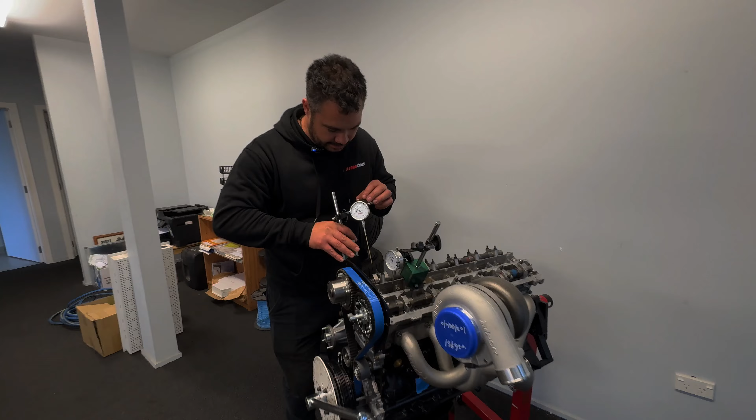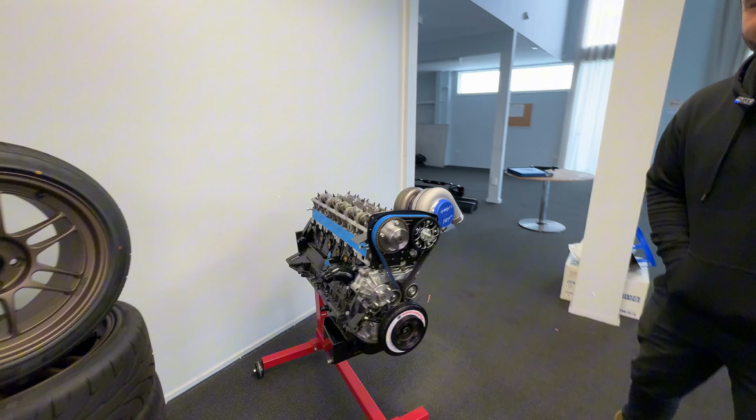It's Josh here from Kelford Cams, and today we are going to be doing some cam timing on this RB25 Neo engine. Making sure that our opening and closing events in regards to piston position is very, very important.

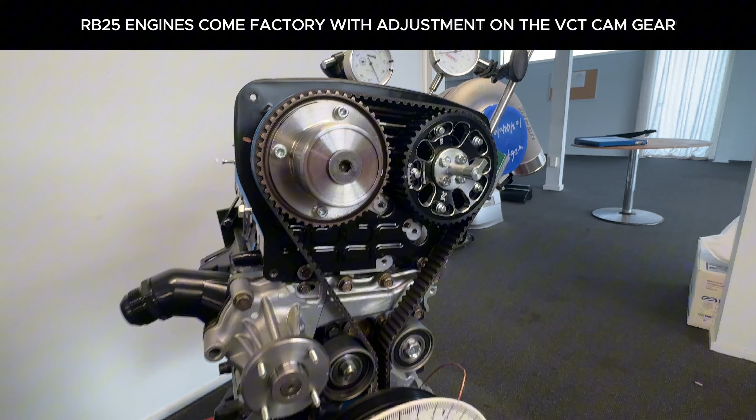So anyone with an RB25 hydraulic engine or solid lifter Neo, they do come factory with adjustment on the VCT cam gear. In this case, there has been an aftermarket, Franklin Performance I believe, option fitted. This allows you to adjust the front of the cam gear without actually removing the cam gear.

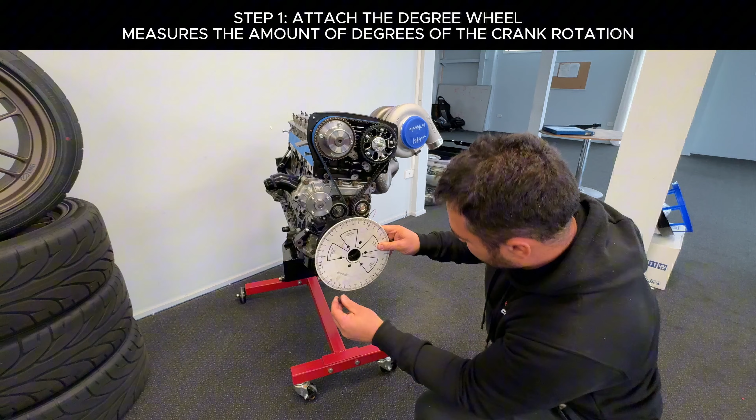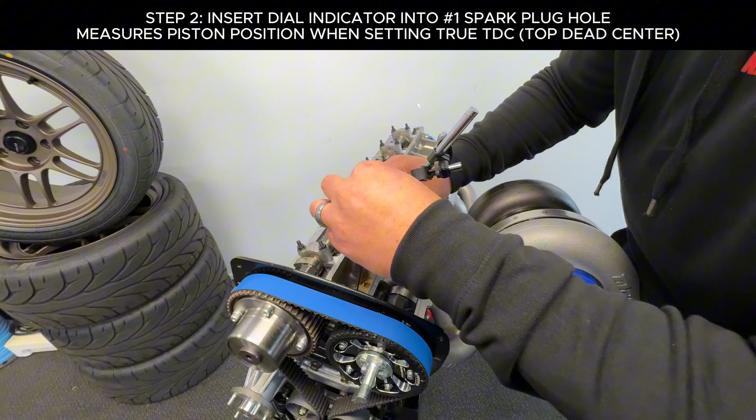Right, first up is our degree wheel. The degree wheel is going to be measuring the amount of degrees of crank rotation. Alright, so next up is putting a dial indicator into number 1 spark plug hole. This here is going to be for us to measure true TDC. And we are going to zero our pointer on the degree wheel.

The reason we're doing this is because there is always a piston dwell that's dependent on rod ratio, the length of the conrod in regards to the stroke of the crank. Because there's going to be a point that the piston stops but the crank still moves, we actually need to find the middle ground of that. So doing this procedure allows us to find true TDC.

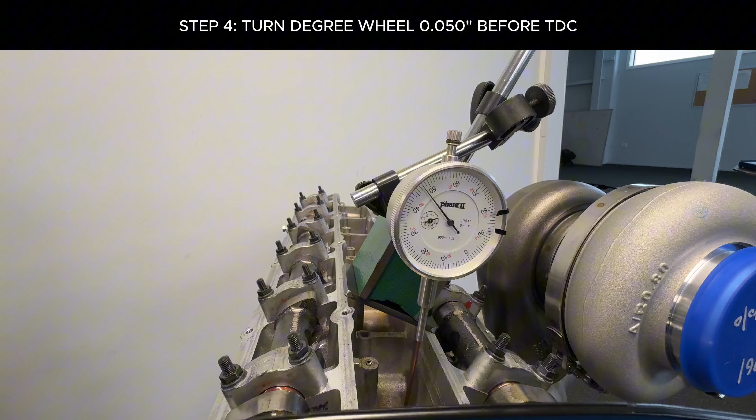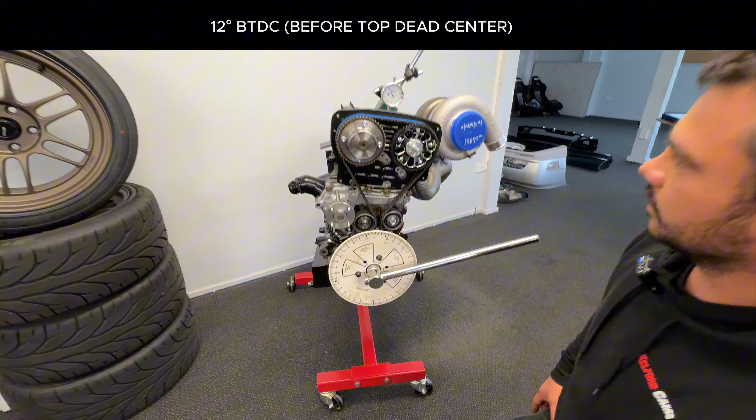First things first, we're going to come up to 50 thou before top dead center. We're going to stop at that point and see what number we have on our degree wheel. Cool. So we are looking at 12 degrees before top dead center on our degree wheel. Alright, so we've found our position, 50 thou before top dead center, and we're going to come up to TDC.

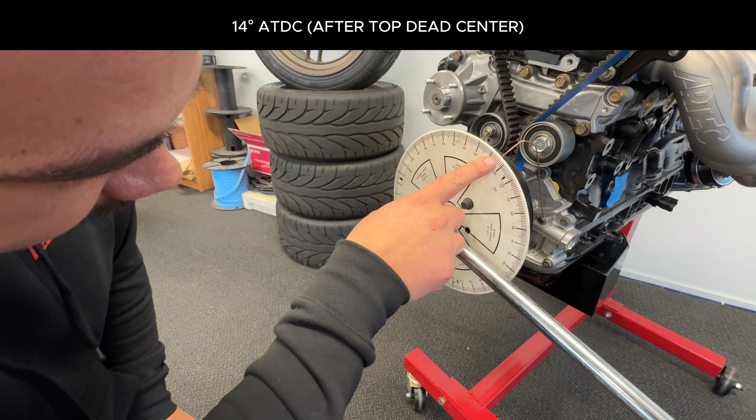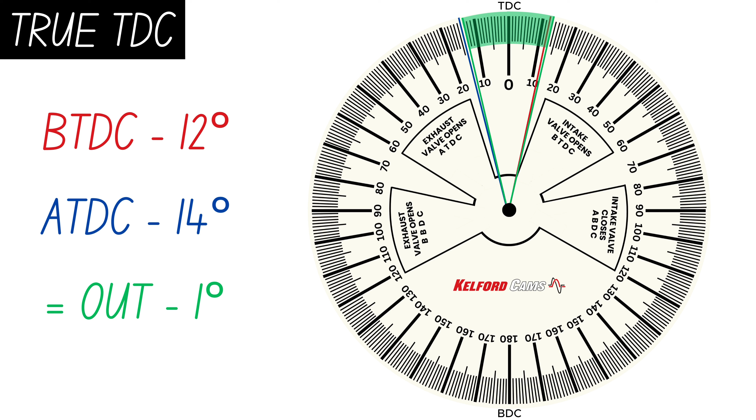And then 50 thou down the bore. And we are on 14 degrees after top dead center. We've done our 50 thou before TDC, 50 thou after. We've got our 2 numbers on the degree wheel, and what we've found is we are actually a degree out. What we're trying to do is actually split the difference here and understand how much dwell is in this engine.

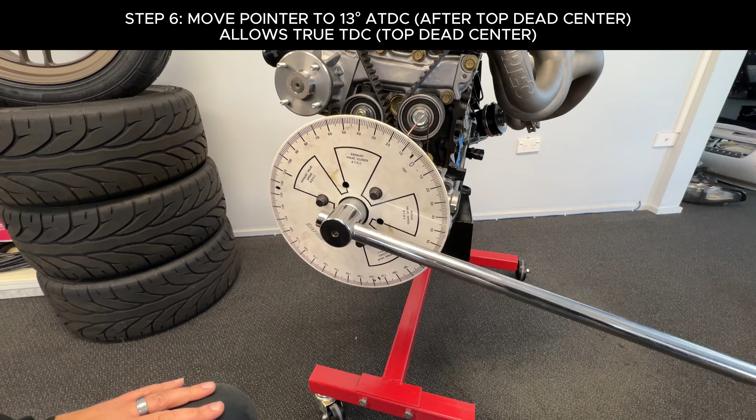Moving our pointer to 13 degrees after top dead center, just like that, will allow us to be true TDC. All right, so we've made our adjustment to our pointer position, and now all we're going to do is just check our work. So we're going to basically go through the same procedure again. We're going to find 50 thou before top dead center, just like that, and we're going to check our pointer position, and we are bang on 13 degrees before top dead center.

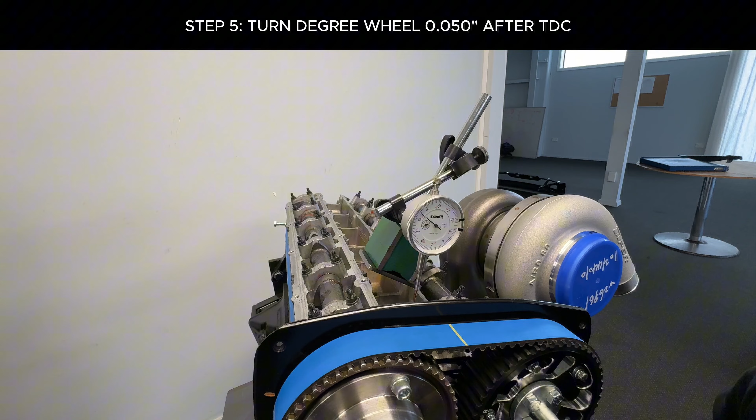So the last thing to do is just confirm we have the same number on the other side. So we're going to come up to TDC, back down to 50 thou, and we're going to see what number we have. And just like that, 13 degrees. So now we're happy to move into the next procedure, which is setting up the dial gauge onto the intake cam and degreeing the intake camshaft.

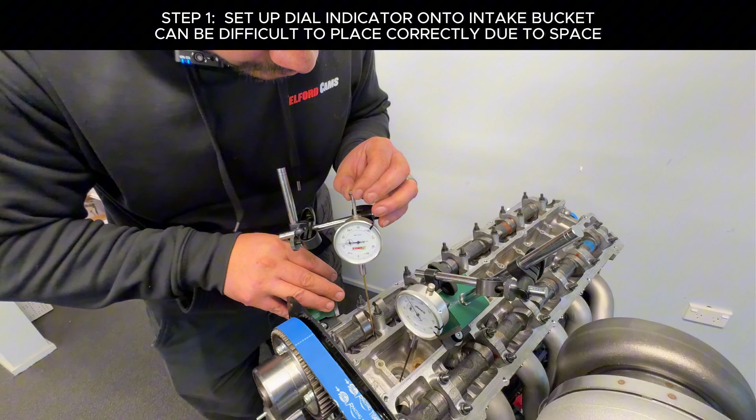Okay, so next up is we're going to set up our dial indicator onto our intake bucket. This can be a painful task, unfortunately. There's not a lot of room between the camshaft and the bucket. So once we've set it up, we want to do some testing to make sure that there's no fouling when we rotate the camshaft. An important note is to make sure our pointer is straight up and down.

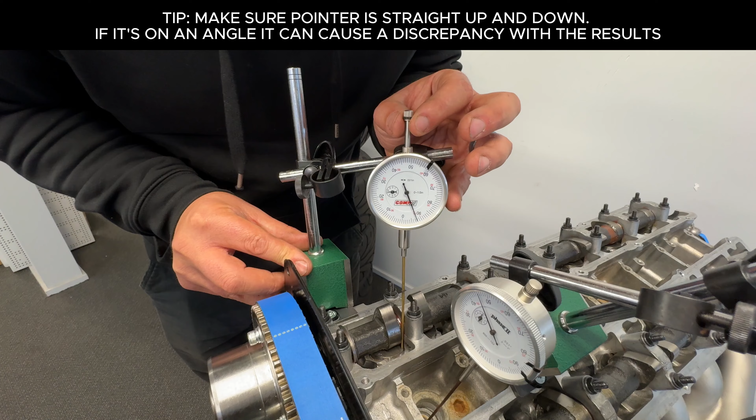Sometimes if it's on an angle as such, we can have a discrepancy with our lift. So just make sure that we're square. So now we're set up with our dial gauge on the intake cam bucket. We're going to go through the motions, look at the opening and closing numbers, do some maths. All right, here we go.

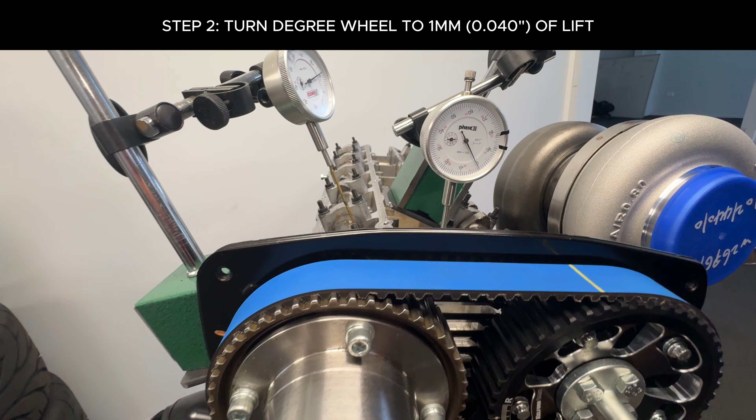So the intake valve's about to start opening. We're going to come up to 1 millimeter of lift. We're using an imperial dial gauge, so 40 thousandths of lift. Perfect, and we're gonna see what number we've got. 9 degrees after top dead center.

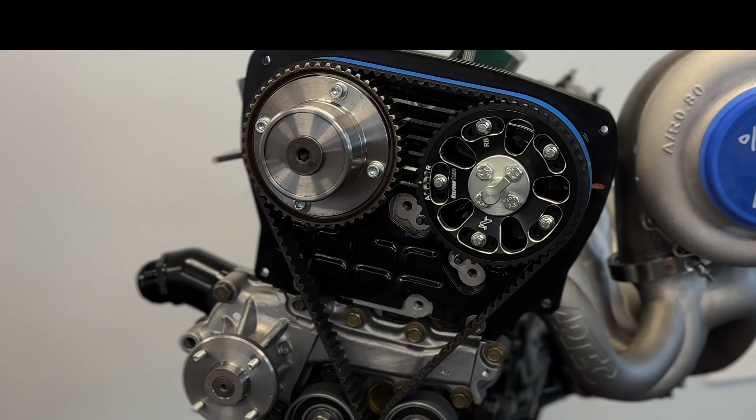Because this is an RB25 Neo engine, it runs a VCT intake cam gear, so that's variable and it allows it to basically start life in a retarded position and advance based on ECU control. Now we're going to go all the way up through to peak lift, and come back down to 1 millimetre or 40 thousandths before the valve closes.

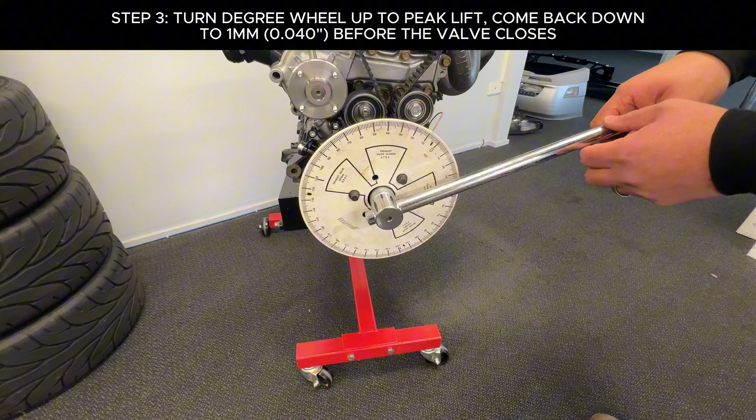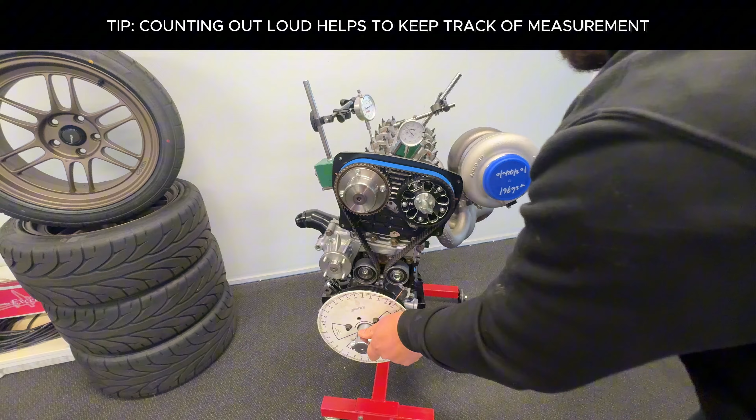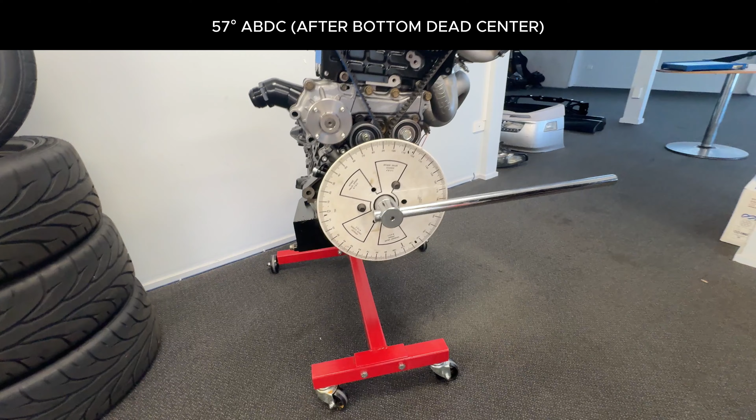So I'm going to count my way up. So that's 100 thou, 200, 300, 410, 400, 300, 200, 100. And 40 thou or 1 millimetre before closing. And we have 57 degrees after bottom dead centre.

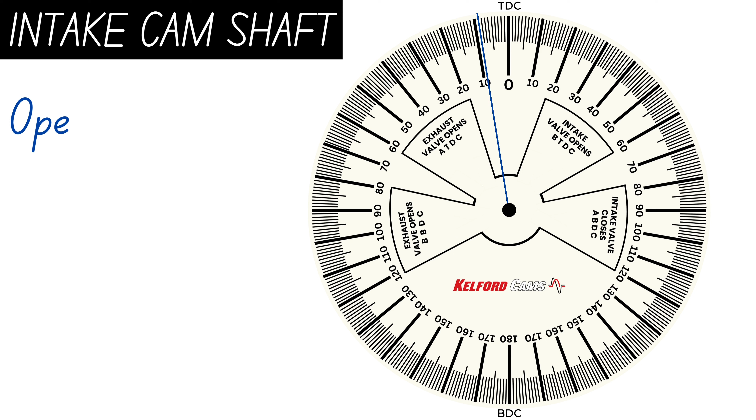Our maths are going to tell us the size of the camshaft and duration, and also the centerline that we're in position in the engine. Our opening number is 9 degrees after top dead centre. Because we're opening after TDC, we actually need to take that number away from our equation, and I'll explain. So we are opening at 9 degrees after top dead centre, TDC being our 0 point. A part of our equation is adding 180 degrees. That 180 degrees is TDC to bottom dead centre.

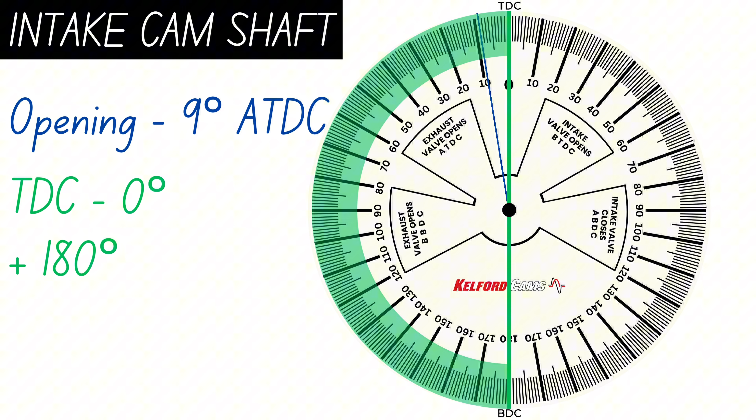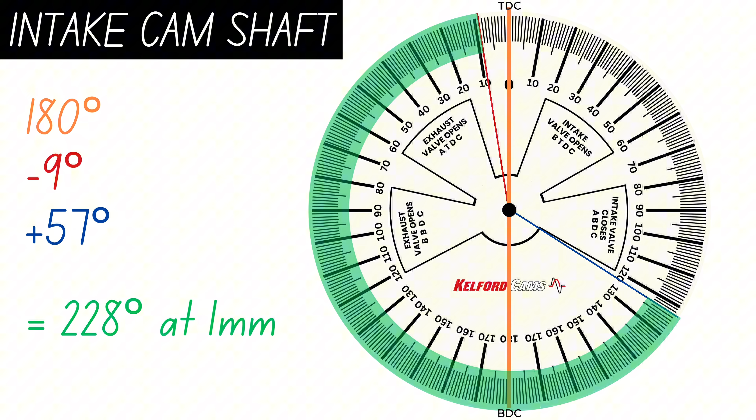So we're going to start with 180 degrees. We're going to remove our 9 degrees and we're going to plus our 57 degrees to give us a duration of 228 degrees at 1 millimetre. From there, we're going to divide our 228 degrees by 2 and we're going to add our 9 degrees to give us an intake centerline of 123 degrees.

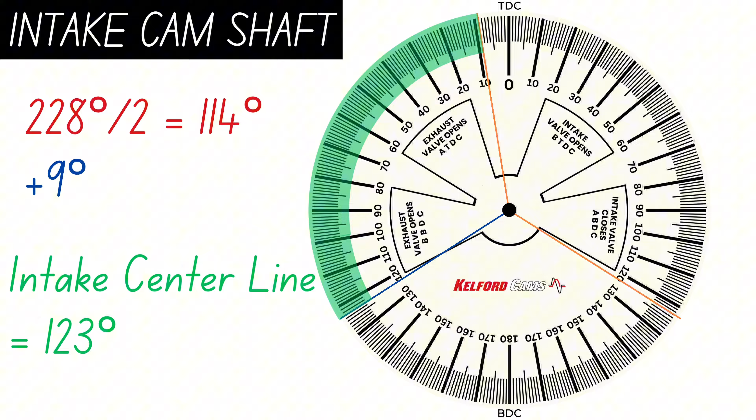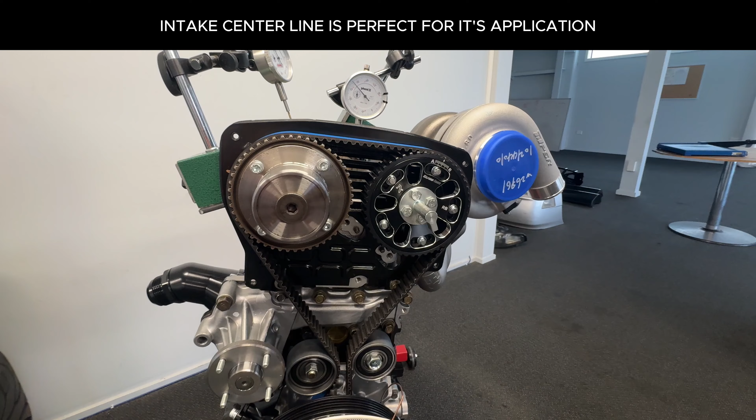So we've established our intake camshaft in the static position. Static meaning the VCT cam gear is not advanced from its home position, is on 123 degree centerline. That centerline is perfect for this application. What happens is the factory VCT cam gear on an RB25 will advance 20 degrees, so that will put us on 103 intake centerline when activated via the ECU.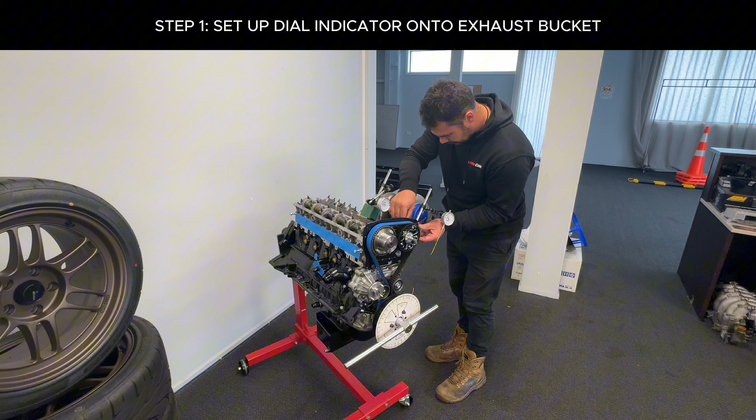So, first step is you want to set up the dial indicator onto the exhaust bucket. Like the intake side, this can be a little bit fiddly. Right, so we have our dial indicator set up on our exhaust camshaft. Going to go through the motions to degree in this cam, check our opening and closing figures, and do some maths also.

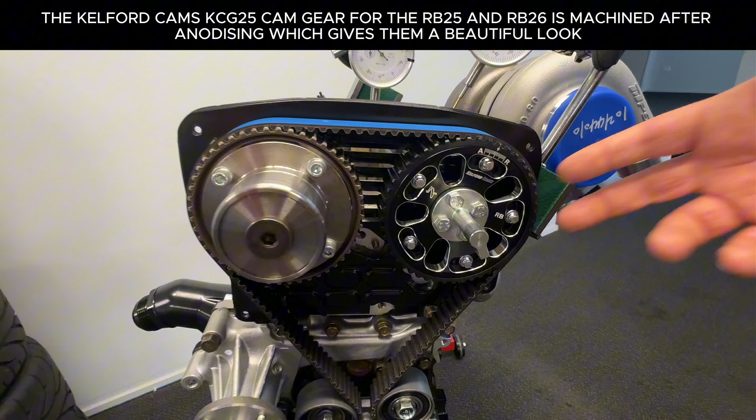Check out this awesome Kelford cam gear. This is the KCG 25 for the RB25 and 26. Now, these are machined after anodizing. They look so good. Here we go.

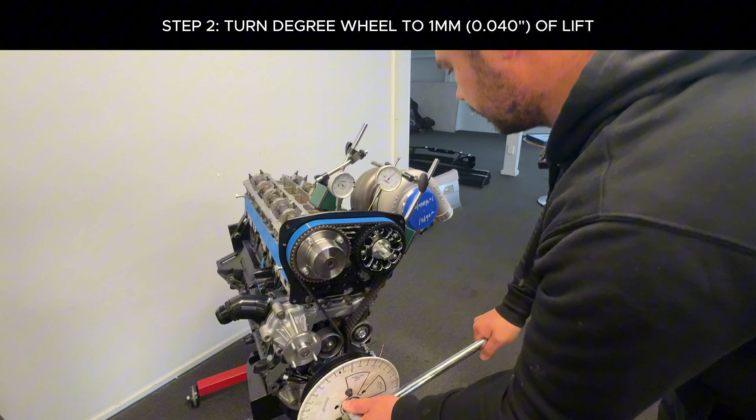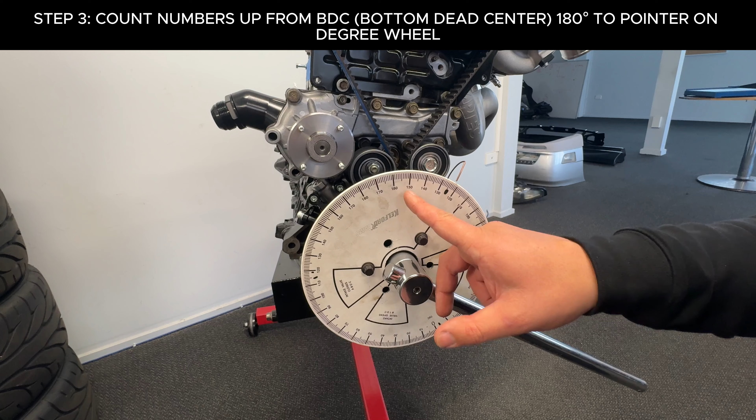Alright, so like the intake camshaft, we're going to come down to 1 mil of exhaust valve movement. Perfect. So the exhaust valve opens before bottom dead centre. Bottom dead centre here displayed as 180 on our degree wheel. So we're going to count the numbers up. 10, 20, 30, 40, 50, 55, 56, 57, 57 and a half. We've got our opening number of 57 and a half.

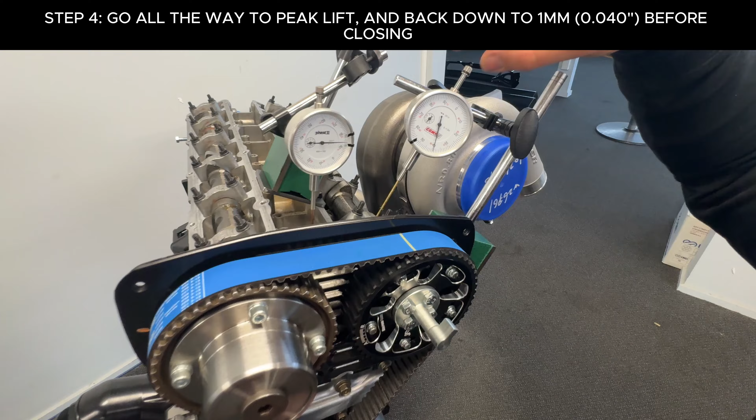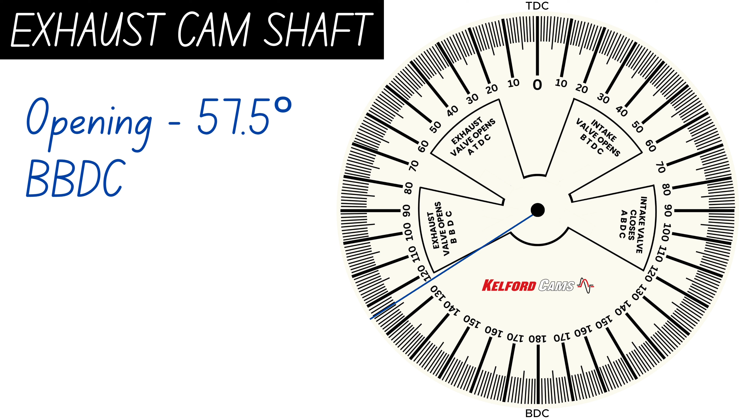Now we're going to go through the motion all the way up to peak lift and back down to 1 millimetre before closing. The number is 1.5 degrees before top dead centre. So we have our opening and closing numbers. The exhaust valve opens at 57.5 degrees before bottom dead centre and closes 1.5 degrees before top dead centre.

So we'll do the numbers. 57.5 plus 180 equals 237.5 degrees. Because we are closing before top dead centre and I've added 180, we want to remove this 1.5 degrees from the equation. 237.5 minus 1.5 equals a duration of 236 degrees at 1 millimetre. And 236 divided by 2 equals 118. Plus 1.5 equals 119.5 degrees.

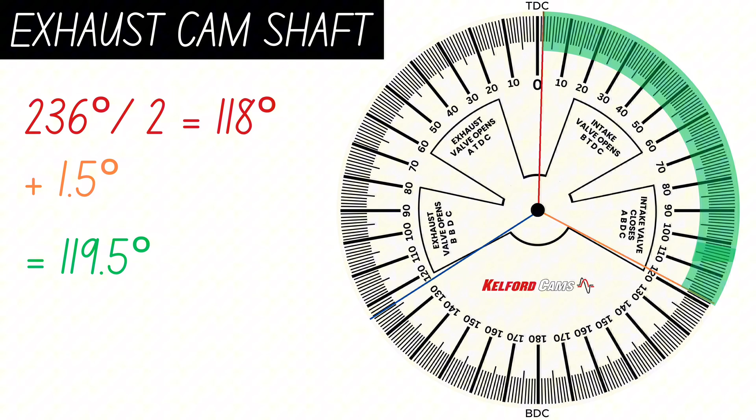These cams are actually in the right spot already and not worth us moving them. So we're going to leave them put. This engine is looking really, really good. Degreeing your cams is a must. It allows us to make sure that there isn't something wrong and our camshafts are in the right position. In this case, we haven't actually had to move them. So that just shows us that obviously our engineers at Kelford Cams and the machinery that we use is very, very consistent.